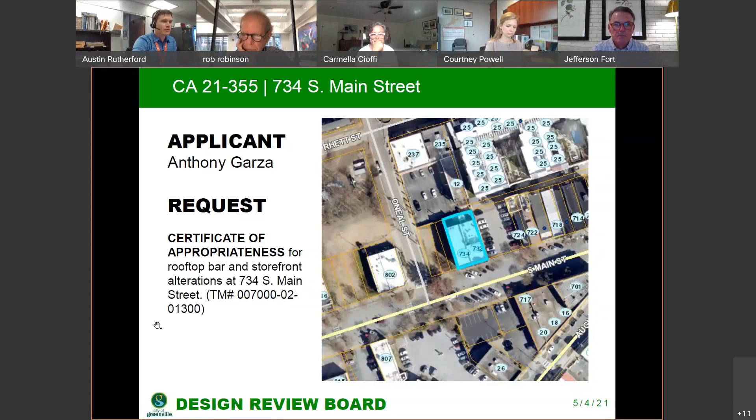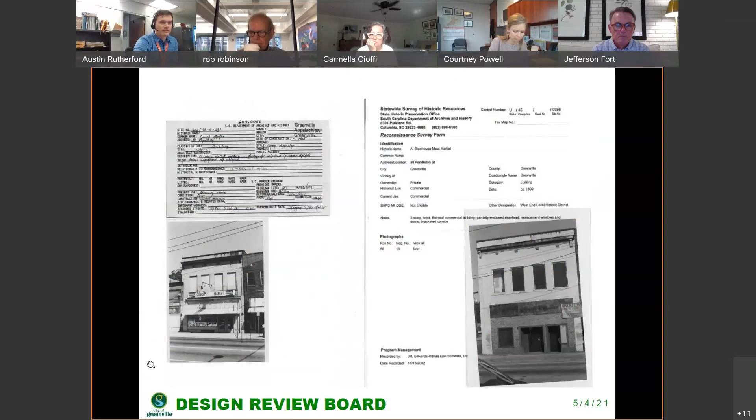They are essentially looking to do what most... well, I guess I should add, these are the historic survey card pictures. As you can see, at least the bottom storefront has been heavily revised over the years, but the top layer has been relatively consistent, though, of course, modernized a little bit.

Again, the rooftop bar—the second floor would also be converted into a restaurant. The rooftop bar is for that restaurant, in which case they're showing a bar feature with a pergola and restrooms towards the rear, with an emergency staircase out the rear.

In addition to that, there is storefront revisions. The current inset is being removed—I can actually, this one's a little bit better—the current inset here with doors on either side is being removed for a more flat panel design with two doorways. Staff is recommending approval, but with specific conditions.

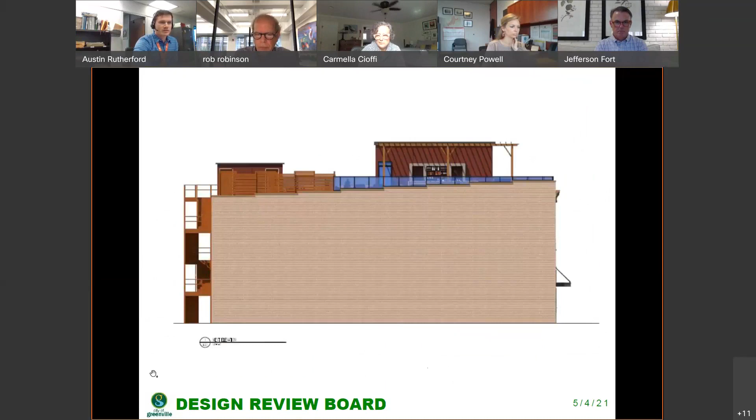One of those conditions being that this front entryway be revised to reestablish the insets for the doorways, and I can answer any questions that you may have at this time for the Thursday meeting.

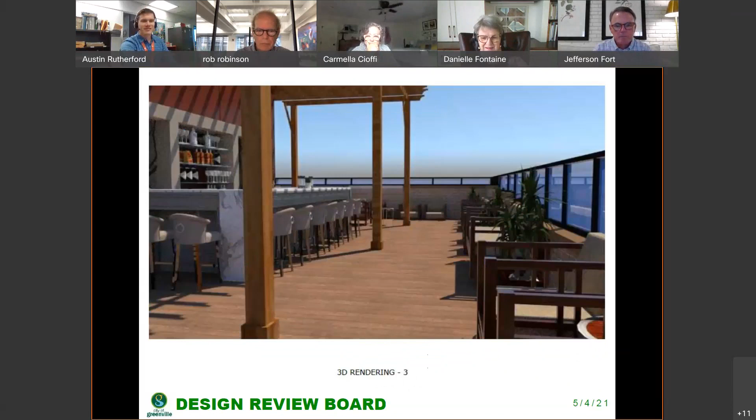Danielle, we can barely hear you. Can you hear me now? That's better. Don't know what happened since last time. I'll check it.

I was wondering, what is the material of the new emergency egress staircase? That's a good question—I could not see it anywhere on the plans. It appears to be wood, though I can get that more heavily addressed before the next meeting. Okay, and is wood an acceptable material for fire egress? That would be up to the fire department or the building services department. I can't answer that myself. I don't believe it is, but we can definitely get that answered in the meantime. Okay, thank you.

Austin, you said that one of the recommendations is to reestablish the door insets—help me understand what you mean by that. You mean the recess where the doors are? Yeah, so right now they're showing that these two doors not be recessed as the current doorways, and as noted, pretty much the entire street front of the West End typically has a recessed doorway, especially on the historic buildings within the historic district. So the recommendation is for a two-member committee to review the storefront revisions pending reassessment of the doorways. Okay, I just want to make sure that's what you meant. That's what I thought you meant. Thank you, yes, absolutely.

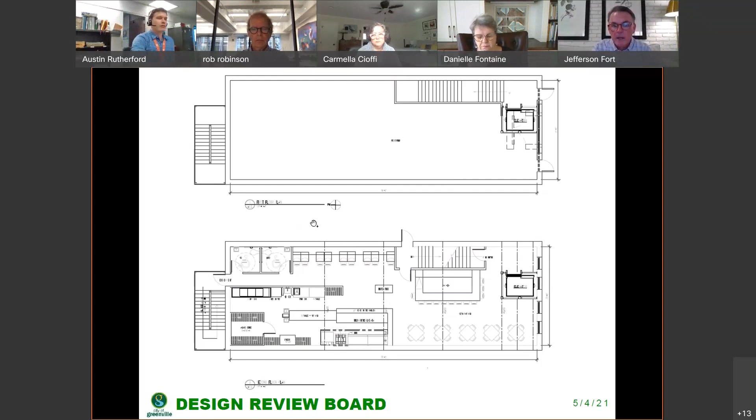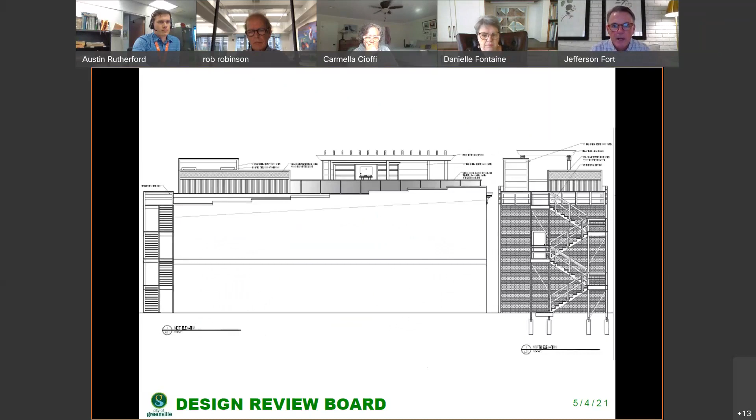...is in regard to the comment regarding the height of the pergola. If I'm looking at issue comment 4, is that the ceiling height of the pergola shall not exceed 8 feet from finished floor? The height of the bar addition shall not exceed the height of the pergola. So height of the roofed area is not an issue, apparently. Do we know what the height of the pergola is relative to finished floor at the roof?

We do not know that height as of right now, and the issue is that depending on the rendering, whether we're looking at just the straight facade rendering or the 3D rendering, the pergola appears at two different heights, and the cross member width is also at two different widths. So we were trying to find conditions to alleviate any concerns upon that discrepancy.

Okay, one other thing, the 18-inch siding material, Austin, are you familiar with what that is? Is that a panel product or a lap product? I believe it's a panel product, not a lap. Okay, so it appears it has horizontal seams. Correct. Okay.

That's all I have for the moment. And I believe the applicant is on right now, so if any of these questions do arise again, they can certainly address them at the formal meeting on Thursday to confirm any and all questions that you may have.

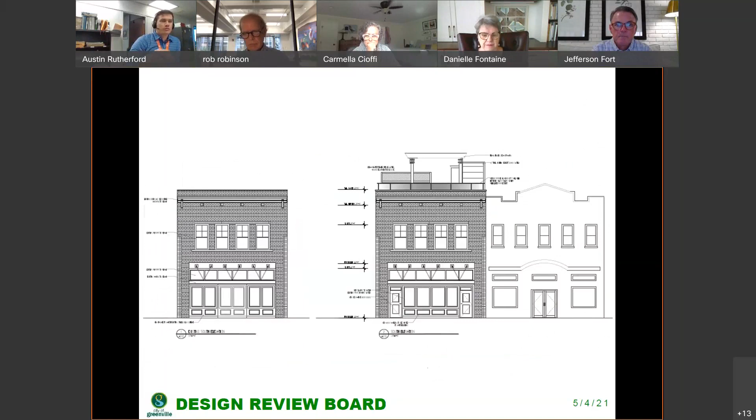One last comment: the rendition of the shielding material around the mechanicals is different on the plans from the renderings, so I'm assuming we go by the renderings. That is another question the applicant may resolve, or the board could condition one way or the other—whether you prefer this type of screening or the 3D rendering screening.

I just want to make a comment really quickly, directed at all applicants, but driven by what we see here. We need to be sure that when things are submitted to the board, they are consistent. It makes it difficult for us to make decisions if things are different from drawing to drawing and we have no idea which is the actual proposal. It makes it difficult to write a report, I would guess, from the staff's point of view. So I would just encourage all applicants to please try to make sure their drawings are consistent from rendering to plan to elevations. Thanks.

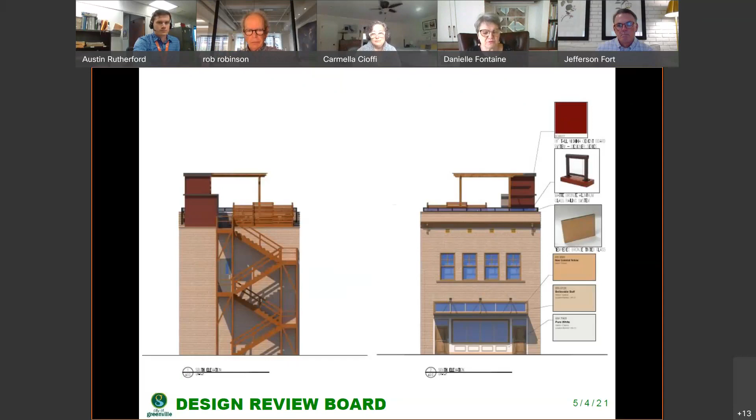I agree. We've run into problems with that when we thought we'd approved one thing and they built something else that was somewhere else in the drawing. So that's a very good point.

If that can help at all, I would like to mention, since we're working on this, that I'm not crazy about that suburban backyard fence material for the shielding of those mechanicals. I wish we would see more urban materials.

That is something that the board could address with a condition, if the board feels glad to do that. Yes, that may be something you wish to include with the two-member board review, if either material is not up to what you believe is acceptable.

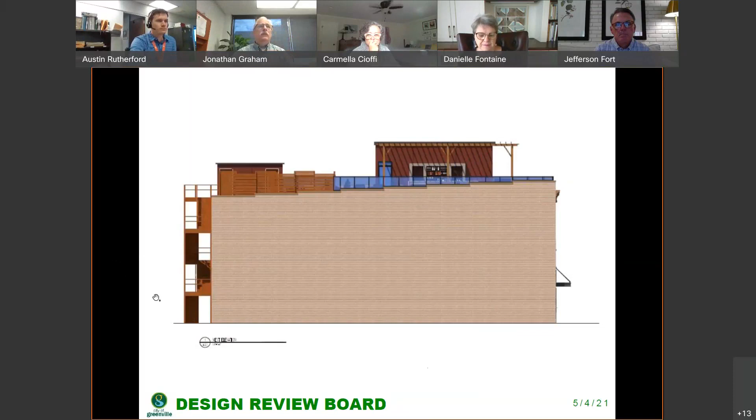Any further questions?

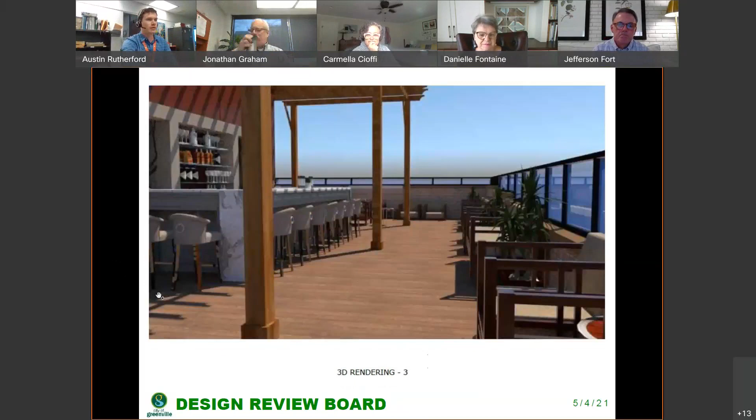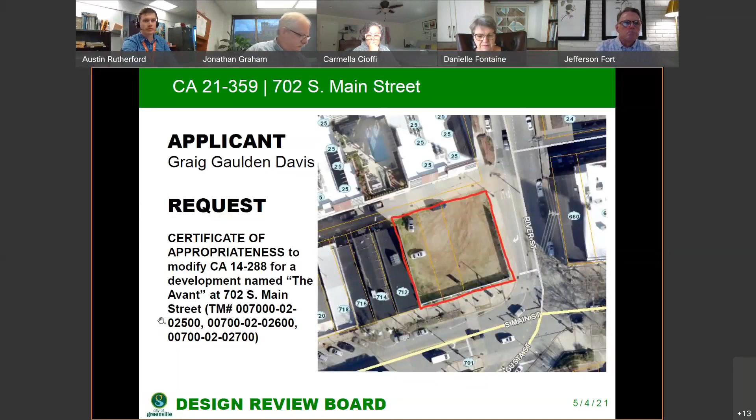If not, item B, which is 702 South Main Street, has asked for deferral. So if you believe that it should be deferred, that can be accepted with your acknowledgement of the agenda for Thursday.

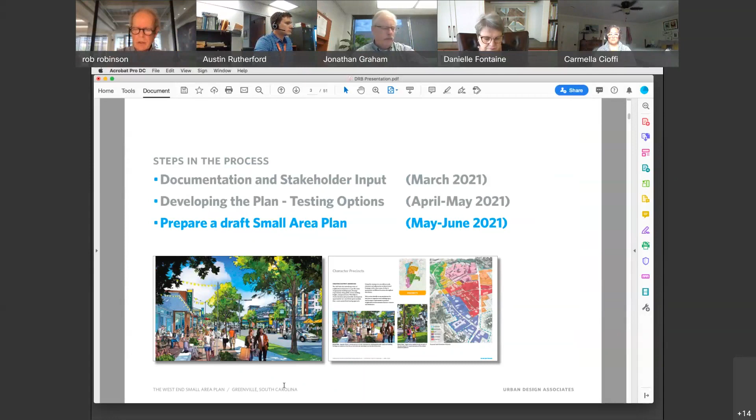And as we start to draft a small area plan, I just wanted to have a little session with you, because you touch so many things coming through here, and get some advice and counsel on what you think are important issues to address as we go forward, and just to take a look too at what's happening.

So we start with the existing land use policies, which, as we all know, are buried in the details within zoning guidelines. And of course, we've got the C4 in the red that is roughly half of the study area for the West End.

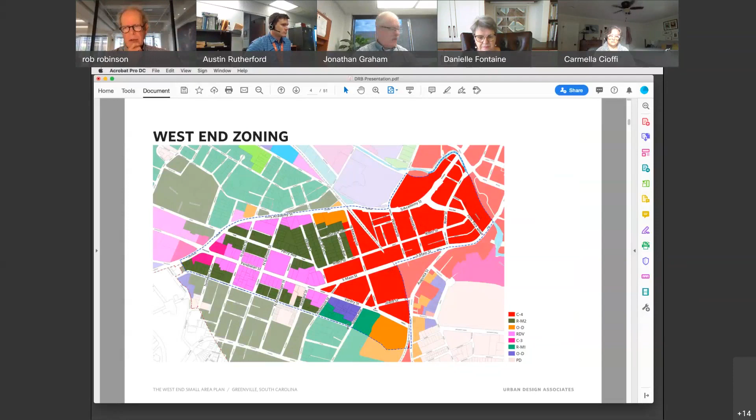The West End study area is highlighted here. There's a little boundary around it. It's not everything, it's this close-in group of neighborhoods that's really the focus for us. So it doesn't go north of Academy, for instance, or east of Augusta Street. And Augusta Street, by the way, we dealt with a stretch of this in the South Downtown plan, so those tend to be consistent visions.

When we look at the patterns and walk the neighborhoods and see what's emerging behind the major corridors, we inherit this kind of fabric of colliding grids, partial streets, some streets that used to go through that don't go through anymore, and intersections that are signalized so we can understand the movement a bit more and how people are circulating or are not.

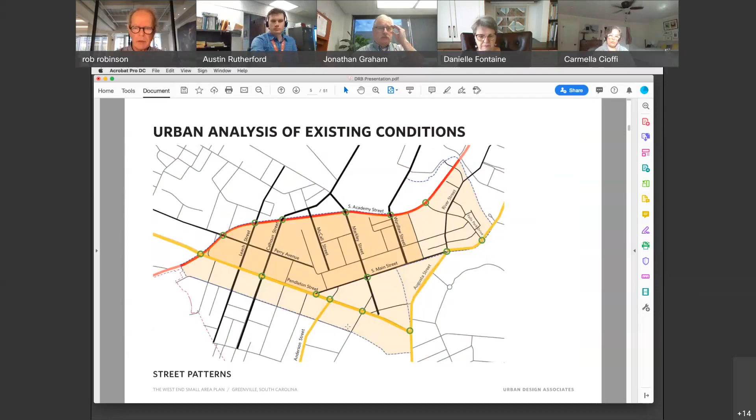And also the different characters between the streets, because not all streets are equal, particularly as an urban street type. And as we add buildings of scale, it brings a particular kind of pressure on the way those streets work. Looking at building patterns that are there, just the footprints, and also the pattern of surface parking lots and vacant land—those things, oddly enough, are almost in balance.

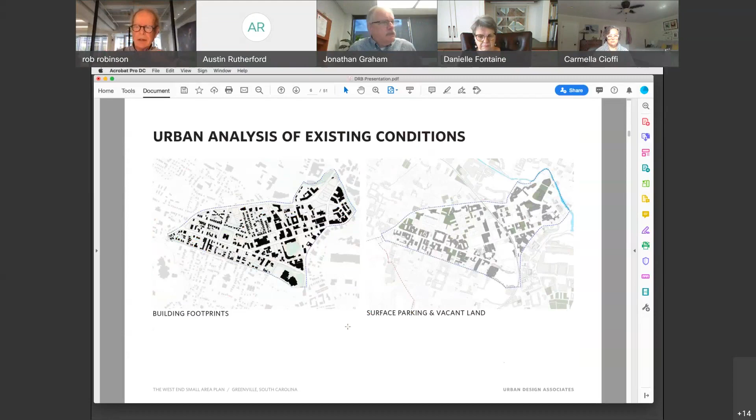So we begin to look at the opportunity sites that are clear, that are being changed and becoming new development parcels as we move forward. In our canvassing of participants, we ask, among other things, what are the most important things to address for folks.

And as people responded, we sort of drop out into these general categories. There was this preservation of character, of course, always a big issue in a changing urban environment. Appropriate scale too—I think early on, folks not really seeing the scale of urbanism change gradually, but all at once, where you have, for instance, a big apartment building landing adjacent to a single family neighborhood, gets everybody's attention real quick, and people start asking questions like, what are we going to be when we grow up? What's happening to us?

There's a lot of sense too that it's important to prioritize both local character and local businesses, and try to avoid becoming a generic sort of franchise, if you will, or commercial commodity kind of building and character along the streets. A lot of concern about that.

And then the need to really look at the tools we have and revise them as appropriate for where we're trying to go. So one of the areas that has been the focus of a lot of new proposals that are changing scale would be Perry Avenue and the neighborhoods around that: McCall, Calhoun, Watson, Grace.

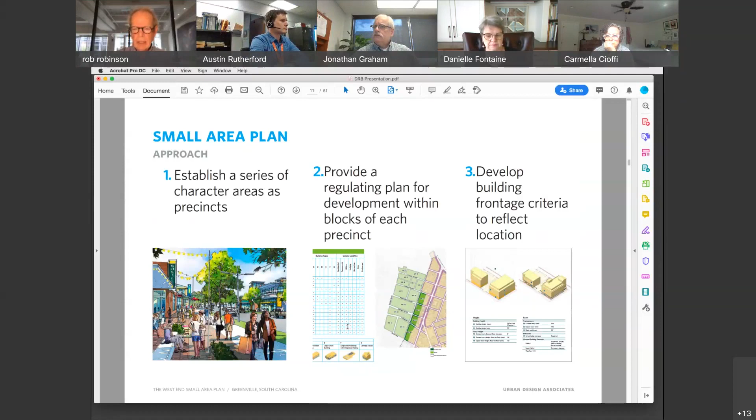One thing we're finding, particularly as we mash up against older single family neighborhoods that are residual pieces of broader neighborhoods in Greenville, is they're constantly under pressure on all the edges to densify and change. So the notion is, what is the degree of change? Are we just setting the stage for wiping the slate clean so that those are no longer relevant building types or places within many of the neighborhoods we're working in?

We had the same issue in South Downtown, as a matter of fact. Or are there more nuanced changes allowed within each of these precincts? So we started looking at building typologies in a couple of ways, particularly in historically single-family residential neighborhoods.

Is there a more defined typology? So in a neighborhood dominated like the Cottage Precinct or the Perry Avenue neighborhoods, would they be small residential buildings that stay in there? We're really 1- and 2-story character now, staying in that range, but allowing for higher densities by attaching buildings, though not attaching 20 together. It may be limited to 3 or 4.

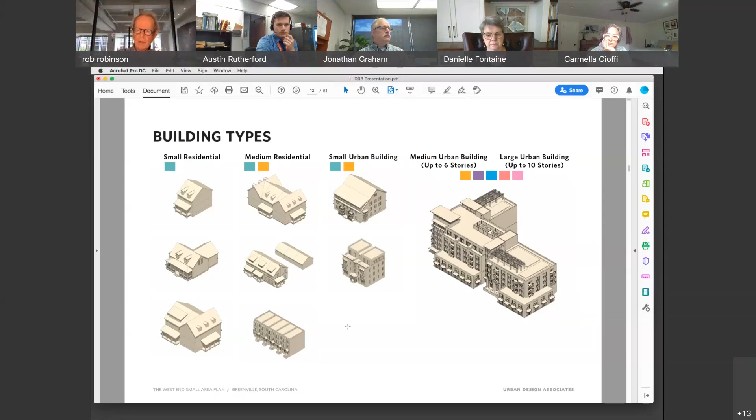It's interesting when you go into these smaller scale neighborhoods now, and you see buildings that are 400 feet long, or buildings wrapping parking that now occupy the whole block on all four edges. What does that mean for us in a design context going forward? How do those buildings relate?

There are some things already hardwired into the design guidelines for the central business district, and those are enforced, like along South Main Street. But on other streets, like from Academy to Calhoun, where it's out of the C4 district, and we're dealing with multiple zoning districts like RDV or RM2, do we need to reconsider how those districts meet each other, and how big buildings might need to step down when adjacent to smaller buildings, or reflect that across the street? So we're starting to noodle with that as an idea.

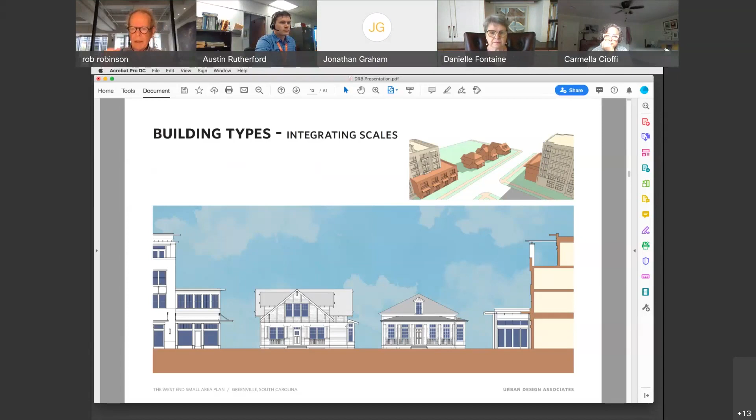People respond to it in different ways. Some just like no big buildings. Others say, yeah, we are in an urban neighborhood, these are going to happen. So how do they happen in a way that acknowledges what's around them? So we look at the portrait of existing conditions, and we go through and code by building use and by building types.

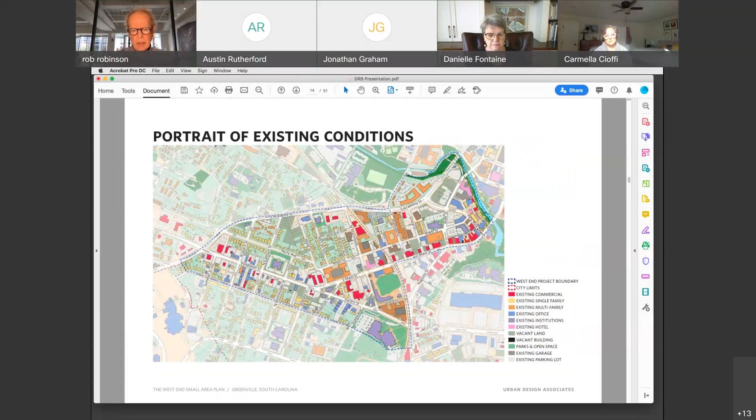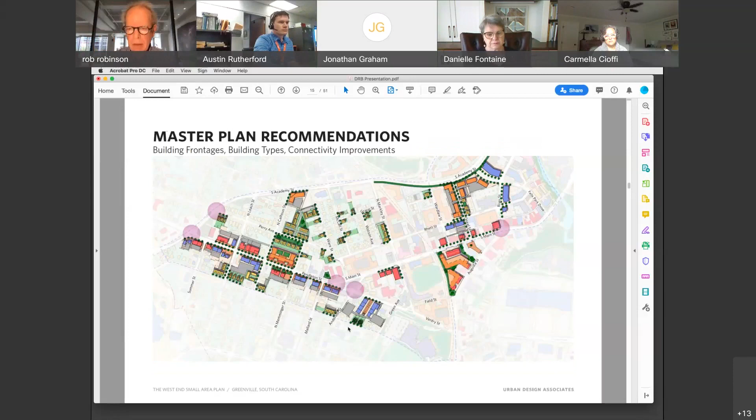And then as we think about where the likely vacant or underdeveloped property is that's likely to infill, what do we want to have happen within the West End and within each of these character precincts?

So we went back into this area and looked at both the adjacencies and the areas we're studying within the district. The Sterling neighborhood, shown in green to the west, isn't in the study area, but it shares the same relationship to Pendleton, a commercial corridor, that Perry does. So some of the lessons we're learning or starting to act on within the West End may also be appropriate for Sterling.

For instance, the street behind, just on the other side of Pendleton, is Arlington. It's getting a lot of redevelopment, but there's no real coherent vision for those blocks about what should happen on one side or the other. We've got office and commercial uses splitting the block perpendicular to Pendleton and Arlington, with things dropping in with no frontage on the street but creating internal frontages instead. So it's kind of a dog's breakfast over there in many of these edge conditions.

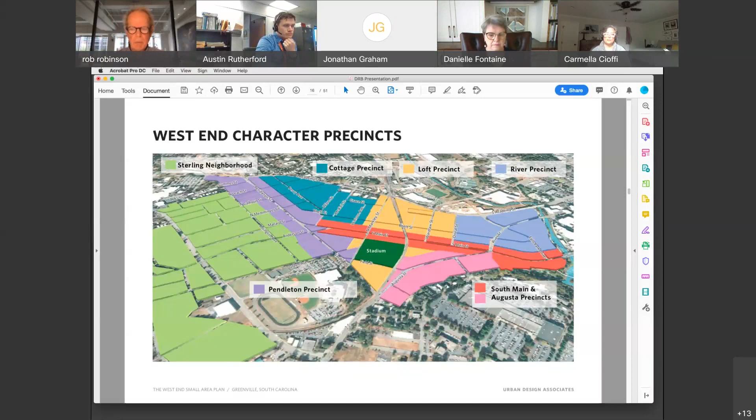So we've turned that idea into what we call a regulating plan, which divides it up by precincts. We've got the river precinct, fronting the river with large hospitality uses. South Main becomes its own precinct, crossing all of these others too, so there's a layering that happens with prioritization for frontage along Augusta and South Main Street. We see those as a pair with similar characteristics, and probably similar rules for how development could occur going forward.

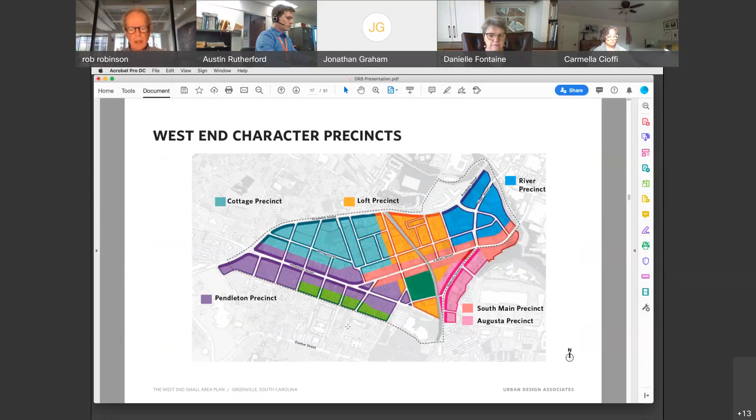The Loft precinct around Markley and all the old warehouses that were residual, and the development on either side going to the stadium; the Cottage precinct around Perry, with smaller scale residential neighborhoods; and then the Pendleton precinct along that street.

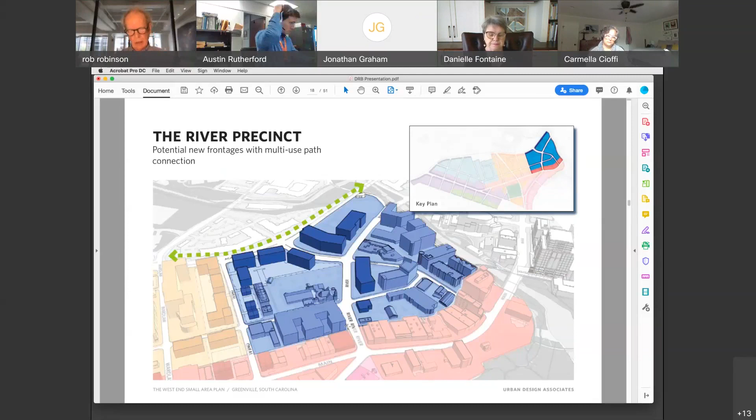So what we're doing is identifying frontages we want to make sure may have active uses engaging the street, but building frontage nonetheless. For instance, where we're showing buildings here, there's nothing but surface parking lots now. So we're beginning to think about character and scale coming back, and how we create whole streets that are great places to walk around.

And then listing it in urban design recommendations. So for instance, on this side, this downtown density we think is still appropriate for the highest density and biggest buildings coming together to build this precinct. We think there's additional public parking needed as this precinct grows, which might service the convention or conference uses and continued hospitality and restaurant uses there.

More pedestrian connections—it looks like there's an opportunity if we can work it out along Academy Street, not within the right of way but just outside, some within and some outside, where we might get a dedicated multi-use trail connecting with the Swamp Rabbit Trail. It could get you all the way to Markley when you look at the tolerances. So that's a connectivity initiative being proposed, worthwhile to explore a little further.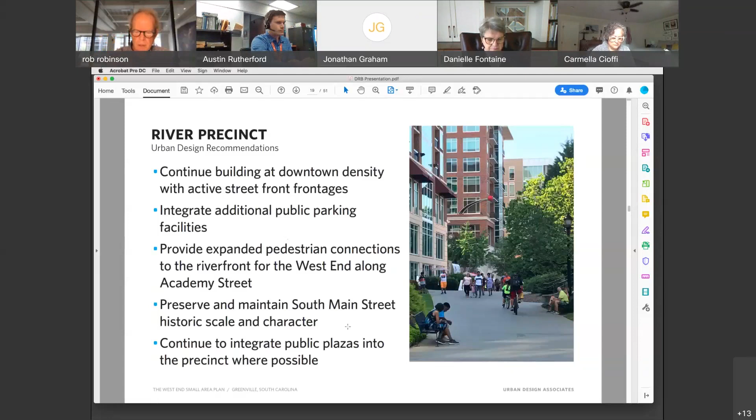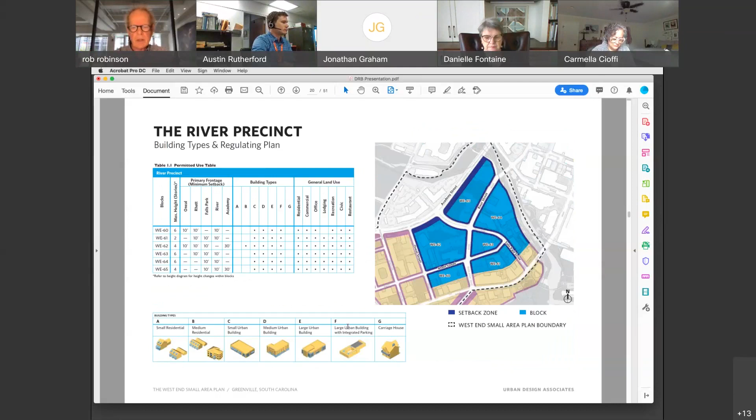Still, the character along South Main Street is top of mind for a lot of folks. We've got pretty good regulations for that, but reinforcing them is important. And then more plazas and small public spaces being integrated into that district as it evolves. This district will have its own matrix talking about building types appropriate there, and we'll have this for you to review and give us comments back as this evolves.

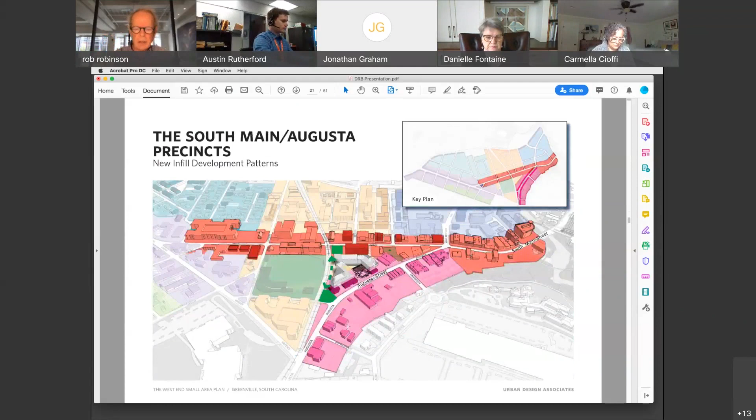So we did the same for South Main and Augusta—very different building typologies along these frontages, different setback criteria as well on some of these streets. And again, what came back from the neighborhood is that these are signature streets. People feel they really connect to Greenville's evolution over time, and there's a sense of not wanting to lose all of that in the redevelopment.

There was also an early idea about this being a pretty art-centric environment. After the West End Village, while we have moments of that in the core of the district, where people aren't really seeing it, they look to Augusta and South Main to be able to express those ideas.

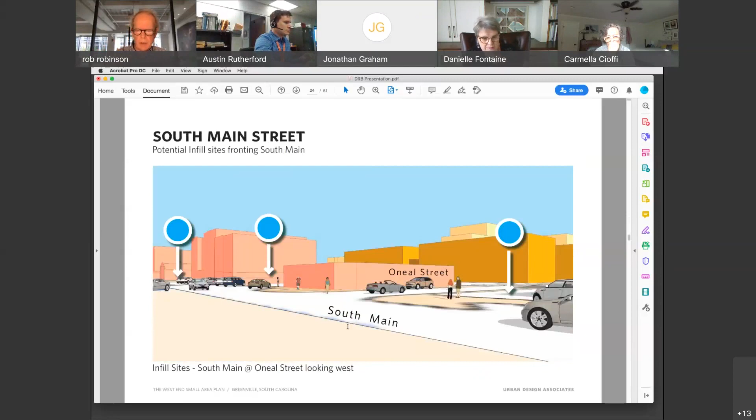So in working with folks, we're looking at the South Main frontage, and you can see empty building lots on the right-hand side. This is Oneal Street that goes through to South Main, and of course the missing teeth all along the street. We look at those opportunities, look at the scale of the existing buildings, and talk about the maximum 30-foot or 3-story height at the street frontage here.

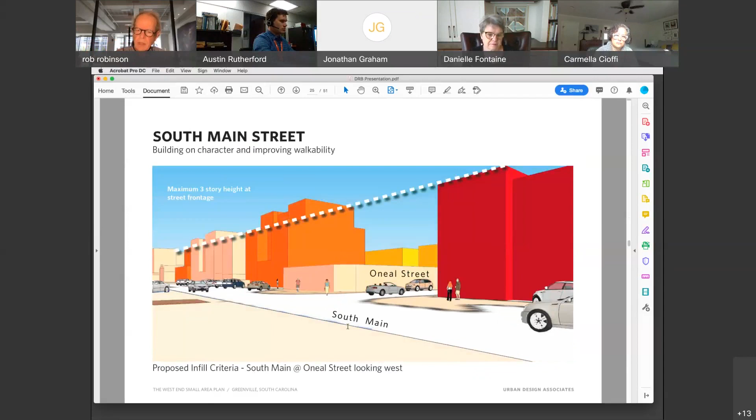And then this idea, particularly in this stretch, which is in what we're calling the loft precinct, built off of the idea of the warehouse precinct, about how we might begin to think about materiality, character, and what kind of street that makes over time as redevelopment occurs.

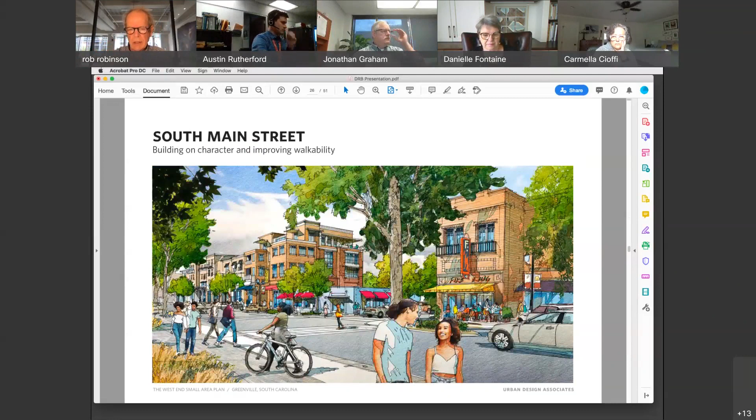So we've got this stretch looking towards the stadium from Oneal. We've got the empty lots. We're looking back the other way now. Almost this entire side of South Main on that eastern side is unoccupied, roughly until you get towards Augusta and South Main. So those kind of guidelines.

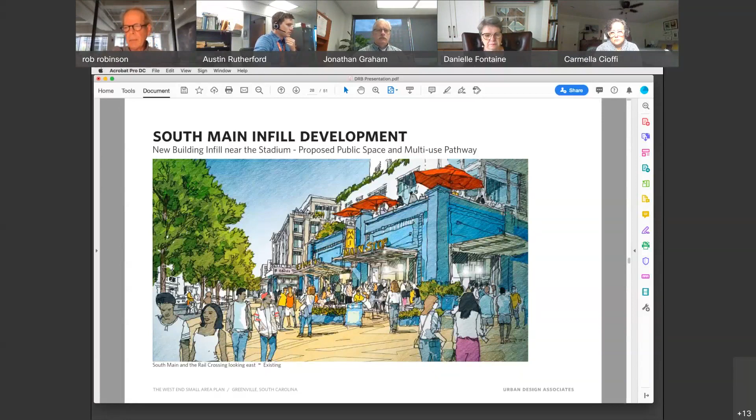Crossing over with where we'd like to do some increased setbacks at the corner of particularly South Main and where the railroad tracks come through, so that we can create a public plaza in addition to dining terraces and pedestrian ways in front. But this is meant to talk to folks about this idea of keeping the frontage along South Main modulated, whereas the buildings may be big as they step back, but there's this kind of stepping towards the street.

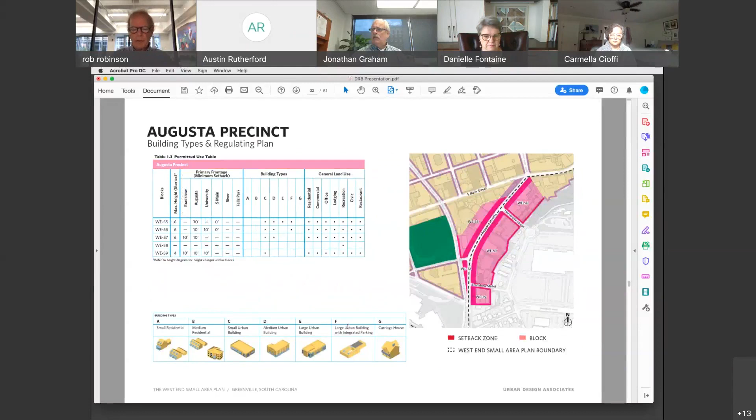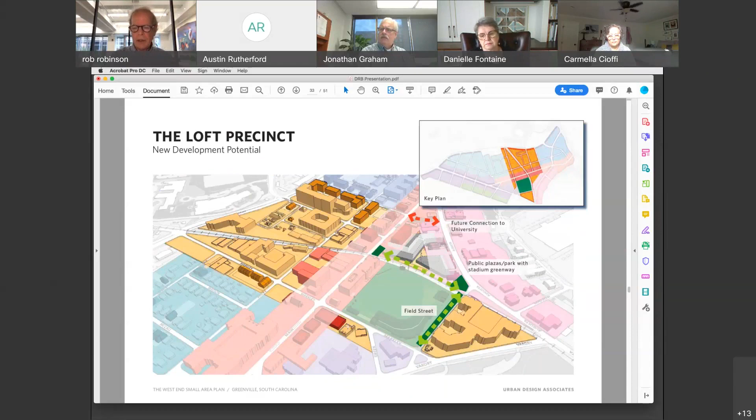So those get coded through for building heights, building types, special setbacks, desirable setbacks. Same for the loft precinct, where both of those front doors, Augusta and South Main, create that setting, but in and around what's happening at the stadium, we feel this is kind of a great catalyst for consolidating the way development feels here as the infill pieces come in, and the Jackson Way development is going vertical now, and we know that there's more redevelopment to happen along the edges here.

So those recommendations, of course, are to preserve that character, integrate public spaces where we can, and we think on the Greenville Transit site, as that redevelops, that's a great place. That's where you saw the Augusta Park at one end and the little South Main Street Terrace at the other end. That could contribute good public space to the neighborhood.

We also think that there is a great opportunity to create a stadium walk on this site that's on the eastern side of the stadium that connects South Main and Augusta together. And that maybe architecture within the loft precinct is responding a bit more to the DNA of the warehouses that grew up along the tracks. So it's taking cues from that, pretty much like the stadium did.

And you see a few of the buildings that will fit into that kind of ethic. And so looking at all of this, you can sort of see from the air, the GTA site in the red. There are other property owners in there too, it's not all GTA. So I call it the Augusta Triangle, because you can't really tell what's happening in the middle. You only know the edges.

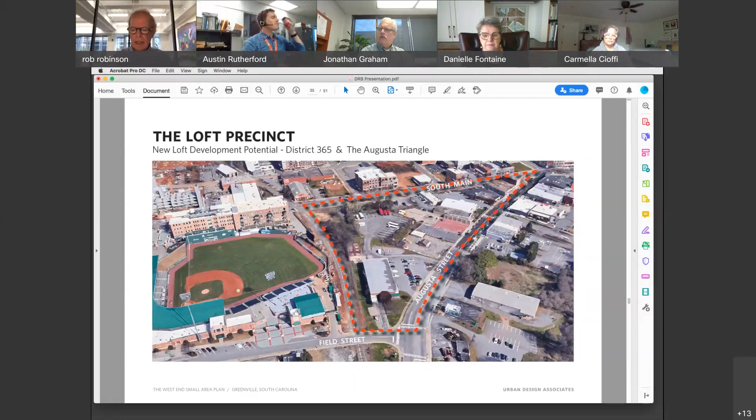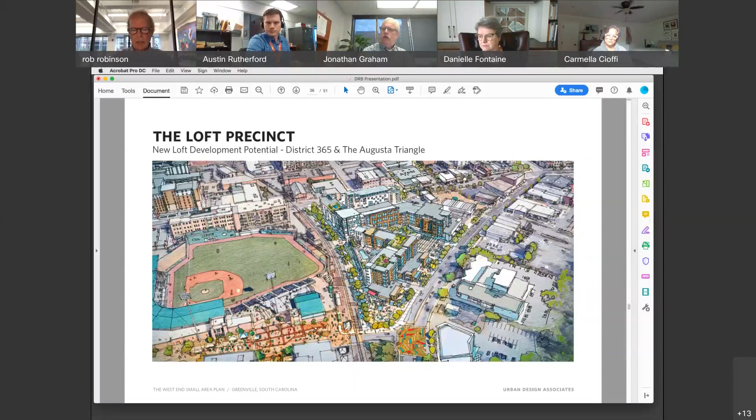But this is the sort of core of the emerging loft precinct, the scale of buildings within that triangle we think can be bigger. The frontage on South Main and the frontage on Augusta can also respond to that scale, so that there's a split in the way that buildings are asked to front those two spaces. Again, this comes with its own precinct standards.

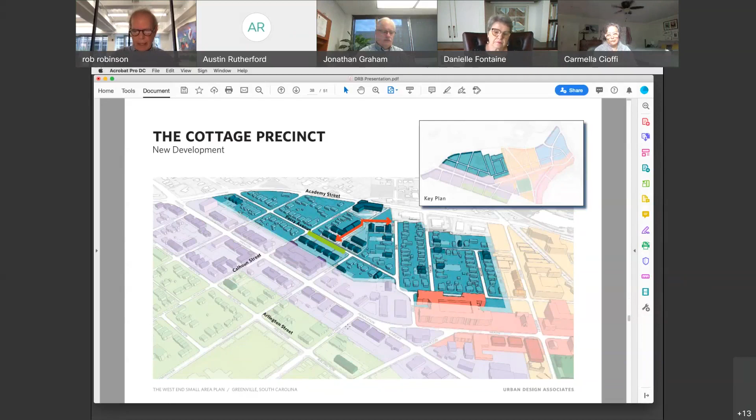The cottage precinct we talked about, this is where we get a lot of times the most activity and zoning approvals, and where the planning team is spending a lot of their work as new development comes in, to what's appropriate. What do we really want to protect and allow to grow back? To what degree do we want to densify this or completely change the character and scale of this little precinct? So we've got active proposals in here now that are upping the density for sure.

The other thing happening here is a lot of new single family detached housing has been built over the last decade, so there's encouragement or integration of that within the pattern. What are the rules of the game adjacent to those uses? With Pendleton as a commercial street, how do the transition zones work from parking lots, dumpsters, trash pickup, and lighting to a single family residential precinct? How do we address those issues?

So we've looked at opportunity sites. There's a state office building site there that over time will highly likely redevelop. So as it splits the district, what should be the face of that block on each of its edges, as it really responds to two very different kinds of addresses?

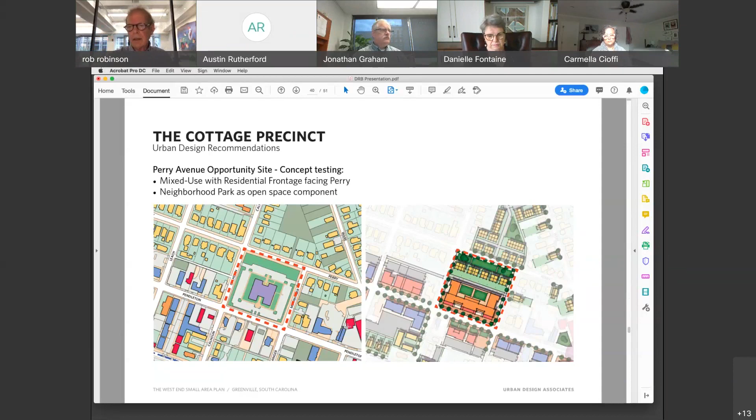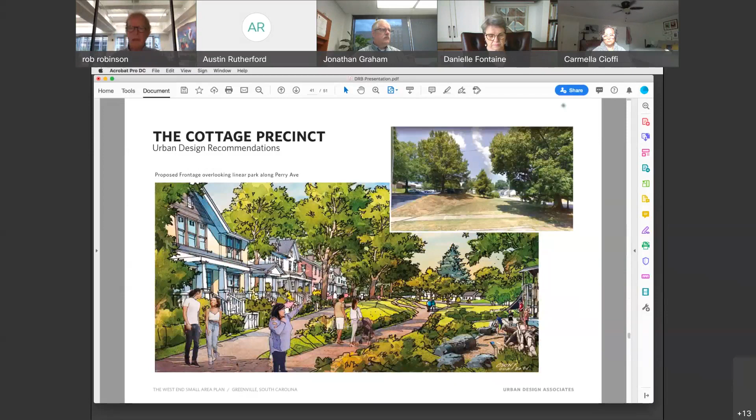This demonstrates an opportunity to have a mixed use development there, but have the frontage on Perry being more sympathetic to residential uses, integrating its open space requirements, perhaps in a linear park along Perry, so that you create a new setting within that neighborhood that reinforces that. Then on the Pendleton side, it gets pretty urban. So we're dealing with that precinct.

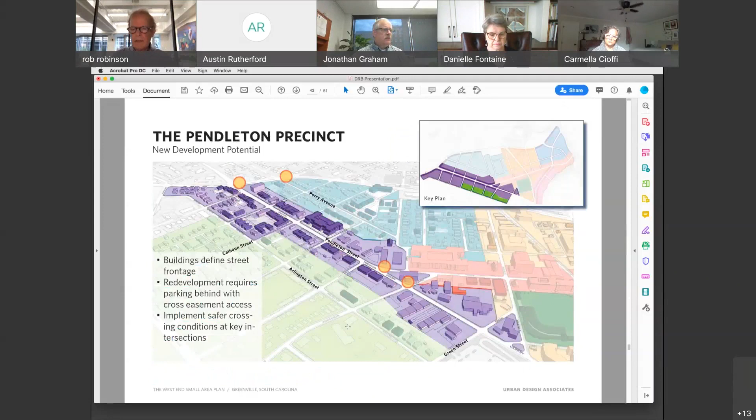Pendleton, we talked about starting to change the body language and relationships of how buildings are sited to the street, knowing that we need to get cross easements, start eliminating some of the curb cuts, and bringing parking in off the side streets instead of a free-for-all along Pendleton.

So we've begun looking at how we might integrate bike infrastructure and a better pedestrian experience here. It's fast-moving traffic, 4 lanes, and it ain't fun to walk along the side of the street. You see 2 new redevelopments in the lower right-hand corner starting to inch up, but it's clear nobody knows what that public space is between the street and the building.

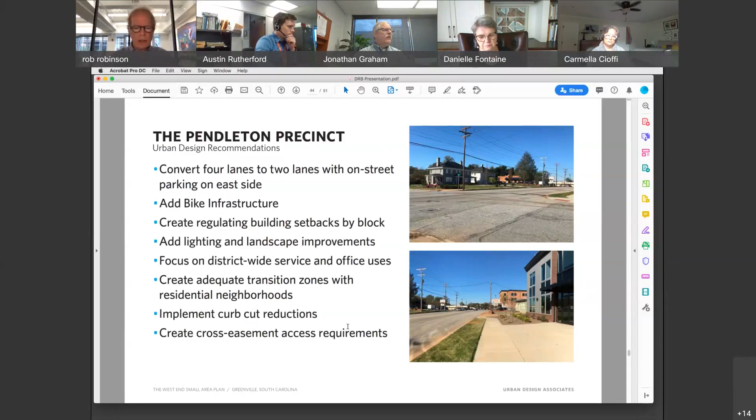So we're looking at the idea of reducing lanes there, thinking about this as a kind of village main street, if you will, in the West End. What's happening here is largely redevelopment of some offices and related uses, and this may be a great scale for Pendleton, trying to take some of the lessons from the West End Village.

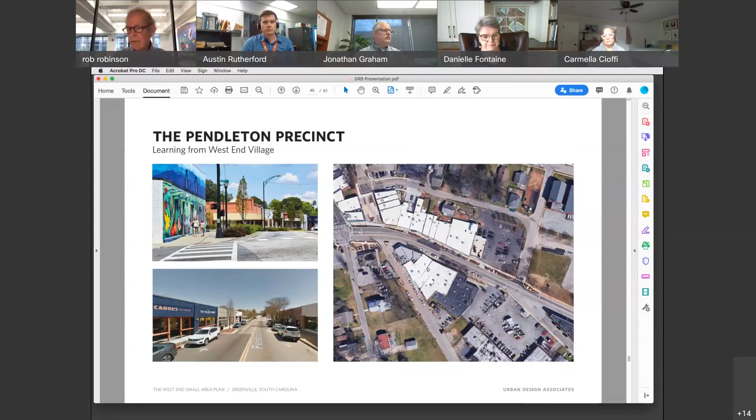It was the same 4 lanes. The city was able to work with the state, add on-street parking, add another layer of landscape that makes the street much more crossable, much more functional for pedestrians and for shop owners who are using this largely as a commercial address.

So, to take Pendleton from where it is today, we looked at 3 or 4 alternatives for integrating in either cycle tracks, which are protected, widening sidewalks into multi-use pathways, adding on-street parking on both sides to slow traffic down a bit and create more parking opportunities, or separating bicycle tracks.

So this is sort of where we're studying right now. We're starting to work with the state on what's acceptable and what they want to see as we embark on this.

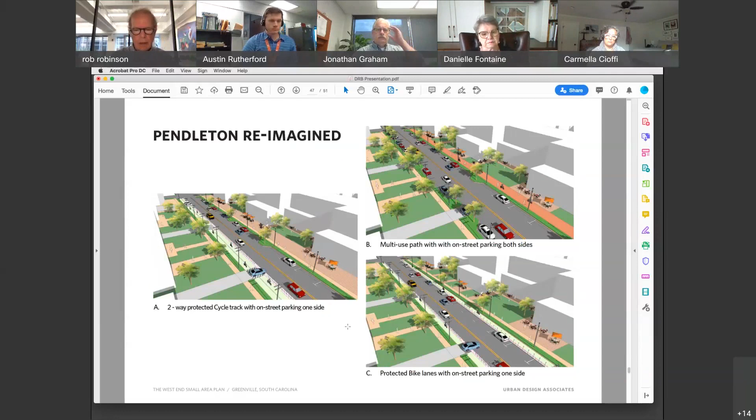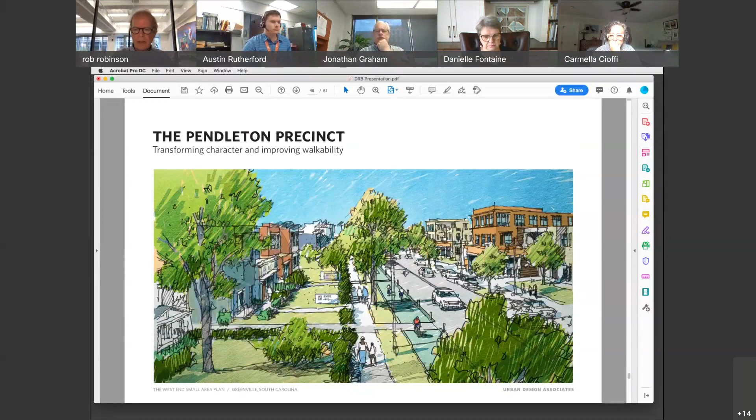We thought Pendleton is a really interesting street. It used to be residential, largely residential, with a lot of large old residential houses, still 3 or 4 left, so this may be a street that changes its character by block. We'll see how that evolves, but some blocks, like the ones on the left, had houses remaining as office buildings now—different buildings, but retaining that character a little along Pendleton. So it's not one size fits all for every block along that street.

So we've begun to work on that for a whole different set of criteria. That's kind of the format for the small area plan.

I wanted to ask you, as you've been dealing with the design guidelines and proposals in the West End and other places, what's helpful to you as we think about this small area plan and starting to set some criteria for an updated land management ordinance or design guideline criteria within areas like the West End? What should our priorities be from your perspective?